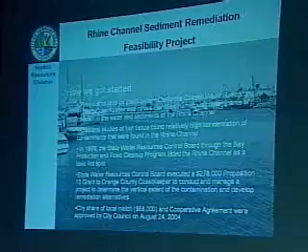I think we're back in business almost. Also, in 1999, the State Water Resources Control Board, through the Bay Protection and Toxic Cleanup Program, listed the Rhine Channel as a toxic hotspot. This is very significant. There's not a lot of toxic hotspots in the state of California, and the state found the contamination to be of enough concern to put the Rhine Channel under this designation.

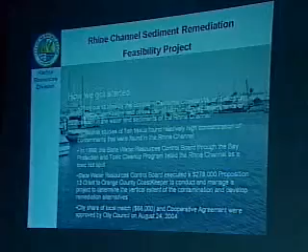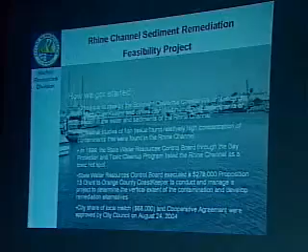The state decided to give us a hand in identifying the contamination by executing a $278,000 Proposition 13 grant to the Orange County Coastkeeper to conduct and manage a project to determine the vertical extent of the contamination and develop remediation alternatives. We already knew the horizontal extent of the contamination from other studies that were completed, but we didn't know how deep the contamination went.

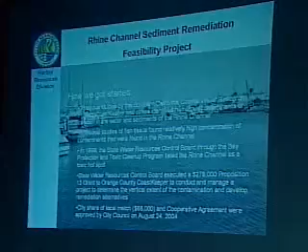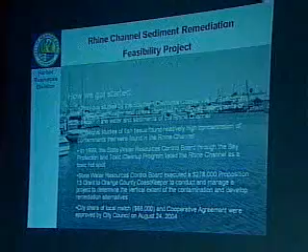Your City Council approved on August 24th of 2004 a local match of $68,000 to go along with this Prop 13 grant and a cooperative agreement with Orange County Coastkeeper to follow through on the study. Next slide. I'm going to turn over the presentation for this part to Ray to talk about a few slides, and then I'll be back to finish it off.

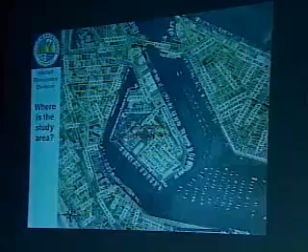Thank you. This is the Rhine Channel project area. I'm sure most of you are very familiar with this area. This is traditionally the industrial part of the bay. So through here we pretty much covered the entire area with sample sites.

So the reason this is more contaminated than the rest of the harbor is because we had things like canneries, metal plating facilities, a lot of boat yards, and different types of runoff - everything from lubricating oils with PCBs to different types of metals - all ended up in the bay over a period of time.

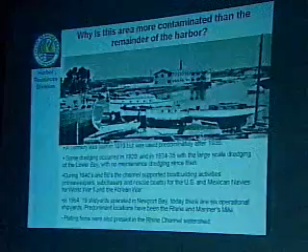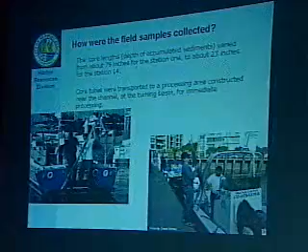So in November, we went out and collected the core samples. Anchor Environmental came out - we hired them as a consultant on the project - and we assisted them in collecting the core samples. We went out to all 16 sites, used 8-foot core tubes along with a piston core, and hammered them down by hand to get clean sediment as deep as we could possibly get, then collected core samples from all 16 sites.

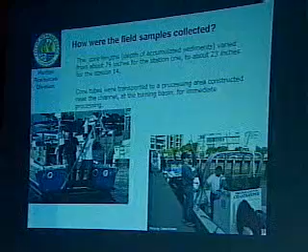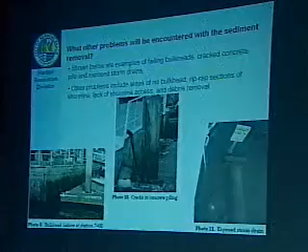Some of the other issues that we found are there's a lot of structural damage. About 400 feet of the channel has some kind of structural damage to pilings or the breakwater and bulkhead that's going to need to be taken care of.

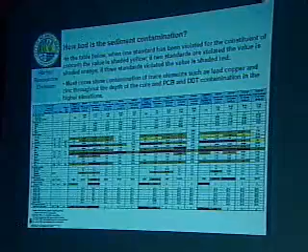In a previous position I had with the county, my boss used to always ask me, how bad is the contamination really? You show us a lot of numbers and graphs and figures, and to a layperson, what does all that mean? He says, what I'd really like to see is the body count. I really can't show you a body count with the data we accumulated, but I can try to show you

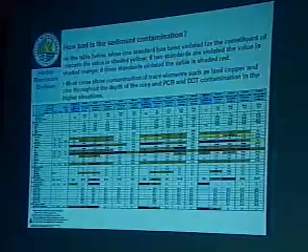in some graphical terms how bad the contamination of those sediments really were.

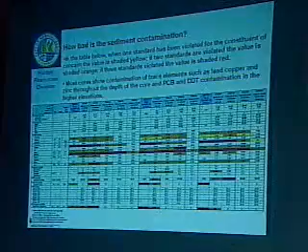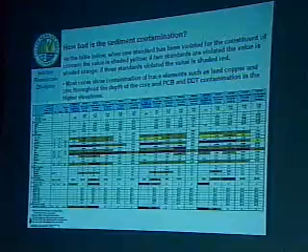We color-coded the data in this one figure to show the violation of standards. The standards are effects-based, so the effects they were looking at are those kind of effects on the biota that could cause death to different types of organisms that live in the water, or illness, or problems with reproduction or respiration, things like that.

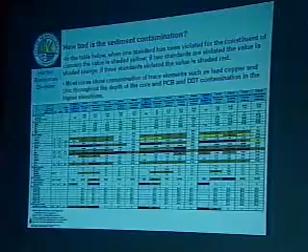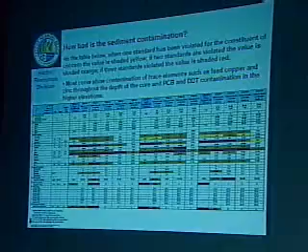These effects-based standards were set by the agencies to really try and find and show us some sort of body count. On this particular graph, those shaded yellow show violation of one of the standards. Orange shows violation of two of the standards, and red shows violation of three of the standards, which you can see by this chart were severely violated throughout the samples we took in the harbor.

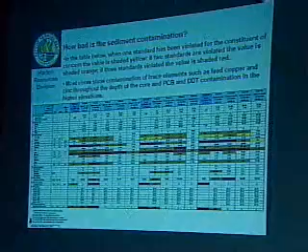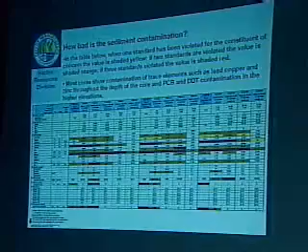What we found mostly were problems with trace elements such as lead, copper, and zinc. PCBs and DDT also showed higher concentration at higher elevations in the cores, and the trace elements throughout the cores. Next sample.

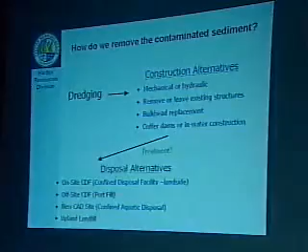We wanted to take a look at what we can do with those contaminated sediments, and one of the things we knew we had to do was get them out of the channel. The most obvious way to do it was dredging, but there's a lot of different dredging methods, and we didn't know what methods might be allowed by the different regulatory agencies.

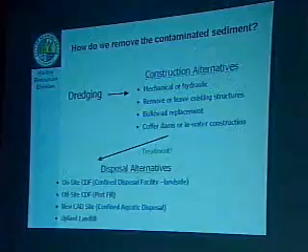So we took a look at them, and some of the alternatives include mechanical dredging, which you may have seen in the lower bay with a big clamshell, or hydraulic dredging, where there's big suction pumps that pump it into a barge. We had to consider whether we would remove or leave those existing structures that were damaged and could become more damaged with the dredging.

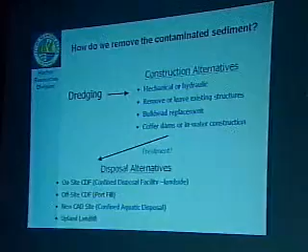Did the bulkhead need replacement in some areas? Would it stand if we removed 3 to 5 feet of sediment? We had to take a look at all that. Could we do it? Yes. Was there ever thought just to encapsulate what's there and leave it there?

The average depth is about minus 10 to 11 through that area, and if we put a 2-foot cap, which would be required to encapsulate it, it would bring us to a minus 8 and would severely prohibit safe navigation in that area.

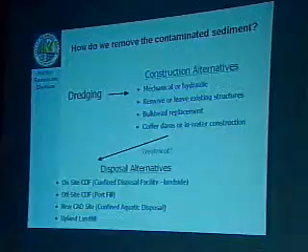And that was enough to dismiss it? I think you're going to come with a big number at the end of this. We also looked at taking part of the sediments out and then capping it, trying to reduce our costs, and that didn't show to be cost effective either. So we didn't dismiss it.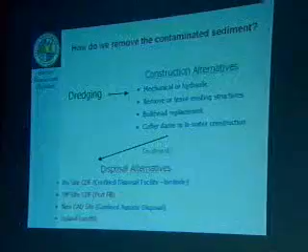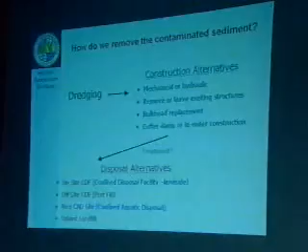We looked at a whole range of alternatives and sub-alternatives that might be the most cost effective. Tell us, what is the depth of the contaminants?

In some areas, like up closest to the Rhine Channel, it goes the full depth of the accumulated sediments down to the natural material, which is about 5 feet. In other areas, it's about 3 feet in depth. Okay, thanks.

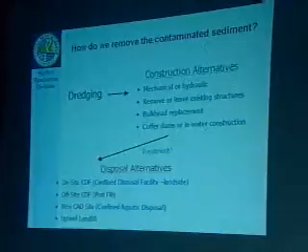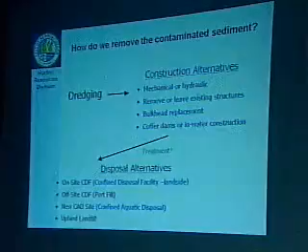We also looked at whether or not we needed to treat the material as we were removing it, or as we would use it in some disposal alternative. So we took a look at a number of alternative treatments. We also looked at what were our alternatives for disposal.

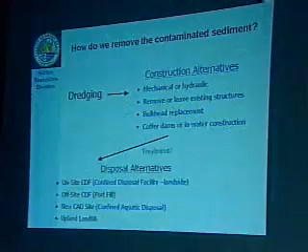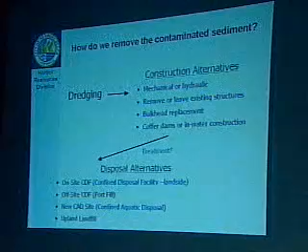An on-site confined disposal facility would be something like filling in little indentations where the Rhine Channel doesn't have a straight bulkhead all the way the full length of it. There are indentations, so we could straighten out that bulkhead along the Army Corps of Engineers established bulkhead line, fill that in, and dispose of some material there.

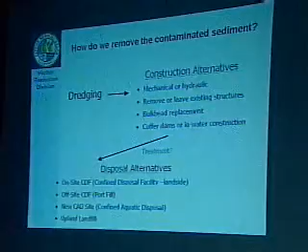We could possibly dispose of it at some future Port of Long Beach fill area where they're building container facilities. So we've taken a look at options like that. We also looked at confined aquatic disposal

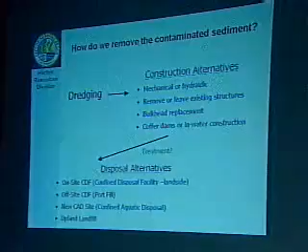methods where you essentially just dig a deep hole and take the existing sediments, which could be reused, and take those completely out of the bay, use them for beach replenishment or something like that, and fill that hole with the contaminated sediments and then cover it. So that's another alternative that we took a look at.

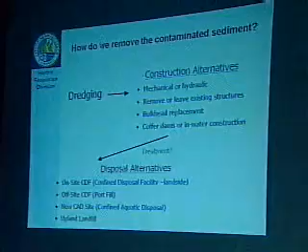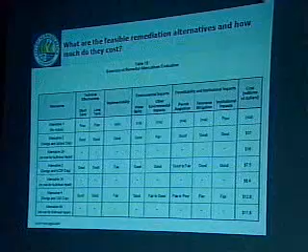And then lastly, we took a look at disposing of the material at some upland disposal site, as simple as your regular Class 3 landfill or as complex and expensive as a Class 1 landfill. Next slide, please. What we came up with was 4 remediation alternatives that we thought were really important to consider further and to have the regional board consider further when they develop their TMDL action plan.

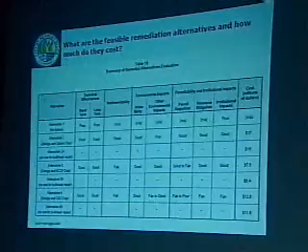The first alternative is the obvious one, the no action alternative. The evaluation criteria we looked at was technical effectiveness for short and long term, implementability, environmental impacts for water quality, biological impacts, things like that.

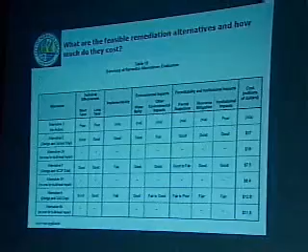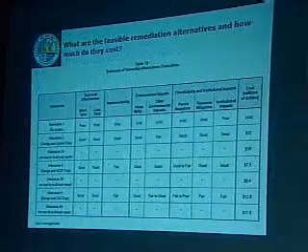Permittability is a huge thing because not all the alternatives have really good permittability with all the different agencies like the Army Corps of Engineers, the Regional Board, the Coastal Commission, the State Lands Commission, that we all have to sell this project to. Whether or not we'll need resource mitigation while doing the project, and institutional impacts like effects on current land use, zoning, and regulations already established.

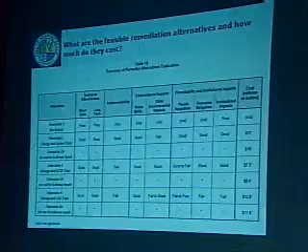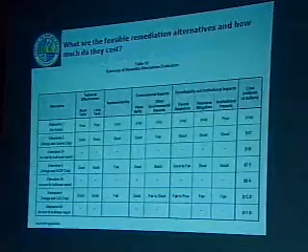And then, of course, we looked at the cost of the alternatives. Alternative 2 was the dredge and upland disposal, which is really a good alternative. It rated really well in all of our evaluations, except finding a landfill close by that will accept the material has been difficult.

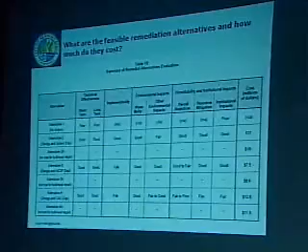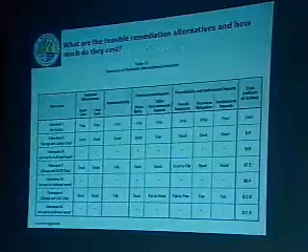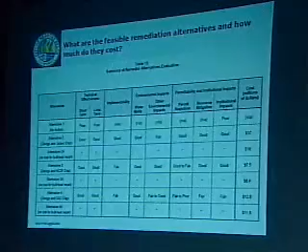We're trying to cut our costs by getting the Orange County Integrated Waste Management Agency to accept the material as daily cover, and treating the material so it could be used as daily cover, but we're running into some difficulties there. That could save us a substantial amount of money if we could do that. We avoid a tipping fee of $27 to $28 a ton, which is considerable for the 110,000 cubic yards we have to remove in this project.

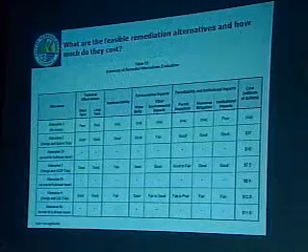You can see there are sub-alternatives here under each of the alternatives where we say not including the cost of the bulkhead repair. We did that because we feel we need to look further at whether public agencies should pay for the cost of the bulkhead repair, or whether it should be borne by the individual property owner, because so many of the bulkheads are in very poor condition right now. So that was considered in these alternatives.

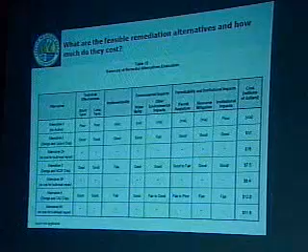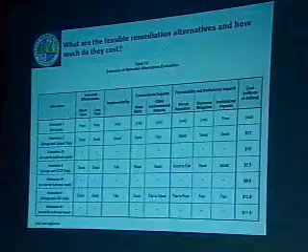The cost of the bulkhead repair, where it's in really bad shape, is about $1 million. Did the city install the bulkheads we're talking about? No, they did not. Were they privately installed? They were privately installed. So that would kind of lead to they should probably be done by the private individuals, right? That's right.

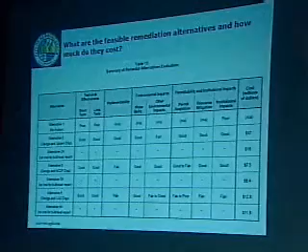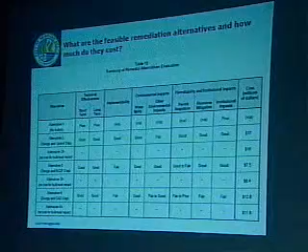Could we go back? The range in cost was about $6.4 million with the dredge and near-shore contained disposal, to about $17 million with the dredge and upland disposal. We think we could reduce that substantially, $2 to $3 million, by avoiding the tipping fees. But any way you look at it, it's a very expensive project to do.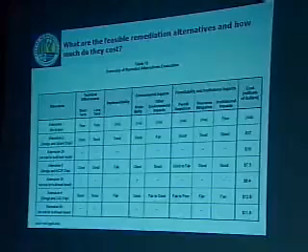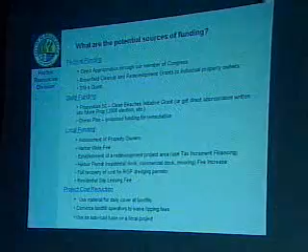This next slide shows that we looked at a number of potential funding sources at all levels. First, we looked at the federal level by investigating whether we could get support from a direct appropriation from one of our members of Congress, whether each individual property owner could apply for brownfield cleanup and redevelopment grants, or whether 319H grants could be issued from the Clean Water Act for non-point source cleanups.

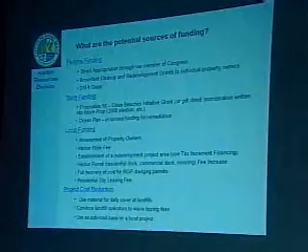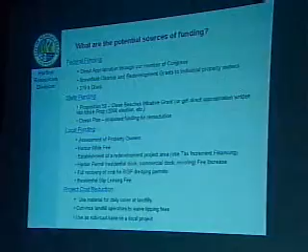We also looked at the state level for Prop 50 grants, especially those related to the Clean Beaches Initiative, or something that may be written into future propositions in the 2006 election. The Ocean Plan is also proposing to have funding available for remediation, and remediation is definitely going to be part of the future Ocean Plan.

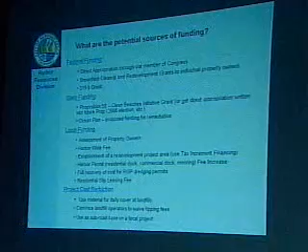I think timing is important there. The regional board is looking for us to implement some sort of action within the 5 to 10 year range. The Ocean Plan funding may not be available within that time period.

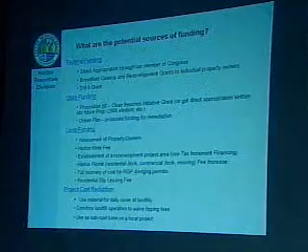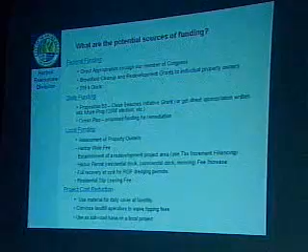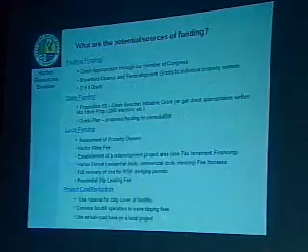We also looked creatively towards some local funding, possibly assessment of property owners, a harbor-wide fee, establishment of a redevelopment project area. We looked at harbor permit fees, all of them, the residential dock, commercial dock, the mooring fees, and potential increases there. We also looked at full recovery of our costs for our regional general permit dredging projects. We don't currently receive full recovery for those costs; we're at about 30% there. And we also looked at residential slip leasing fees as a potential local funding source, so there's a large possibility of local funding sources to help defray the costs.

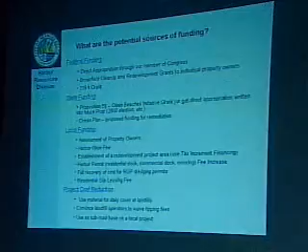We especially wanted to look at ways to reduce the project costs by, like I said earlier, using material for daily cover at landfills, convincing the landfill operators to waive the tipping fees, or maybe even using the material as subbase on some local road projects. We don't think any one of these funding sources is going to fund the entire project; it'll probably be a combination of funding sources that we'll go after. But this is a project that's in its feasibility phase.

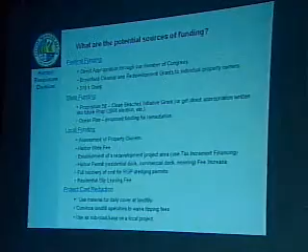I think the next action you'll see is the Regional Water Quality Control Board holding some public hearings and developing a new total maximum daily load regulation that will require us to come up with a plan in a short time period, and then implementation of that plan within 10 years. So I think that's about the timeline we're looking at.

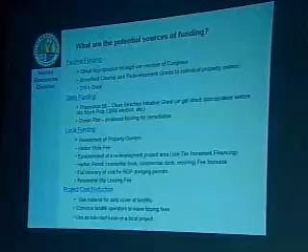Would you be comfortable sharing what your thoughts on those various 3 funding sources, what you think in dollars they could potentially deliver?

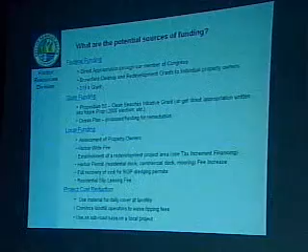I think direct appropriation through Congress could be a very significant amount. We're working to find funding for the remainder of the Lower Bay dredging, and I think we may be able to combine dredging projects. The Army Corps of Engineers is out to bid right now for a big dredging project in the Upper Bay. We'd like to combine that with a Lower Bay project and have this ride on its coattails. So I think that's probably the most feasible, high percentage funding.

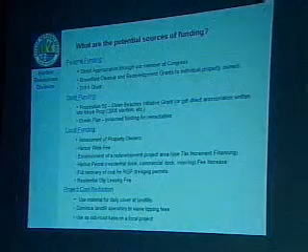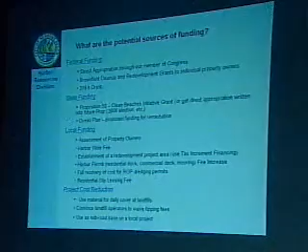It could be federal funding with a 35% local match. The local match could be state monies, and I think Proposition 50 is probably our best local source for getting the 35% local match that we could come up with.

I think that does it for the slides in my presentation. I have some additional slides for possible questions that I may get.

If this is disposed at a local landfill in a class 3, that's just like where we would dispose our refuse? And you'd use it as fill material? I'm a little confused - if it's that contaminated that we got to remove it from the harbor and bay, why wouldn't it be too contaminated to go into the landfills? The marine contamination standards are different than the landfill contamination standards that differentiate whether it has to go to a Class 1 landfill or can be disposed of at a Class 3 landfill. They're orders of magnitude different.

Thank you. What is the potential here for damage to people? I mean contamination, direct contamination. It's the contaminants found in the sediments that can be carried through the food chain, and we're seeing PCBs in fish tissue that has the same fingerprint as the PCBs in the Rhine Channel. Dr. Skinner expressed some concern to me about pregnant women consuming fish from lower Newport Bay, and fish with PCBs are found throughout the bay, and some damage to their newborn.